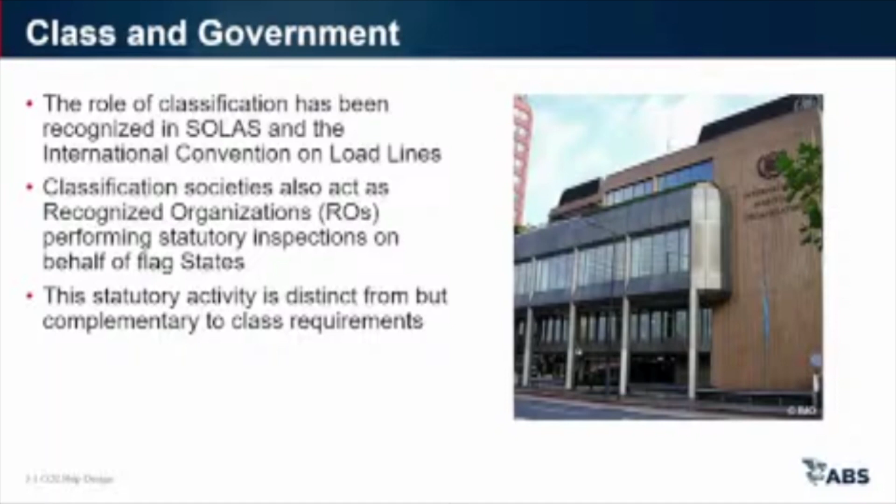The statutory activity is distinct from the classification activity. There's a lot of overlap, and the remits are very similar, but there are things classification societies put together that are not necessarily in the international regulations. How we operate is we work with all the various stakeholders in the marine industry to ensure maritime safety and to ensure compliance with the requirements and the rules.

You can see here the list of various stakeholders, and because of this interaction between all these parties, this is where we start to get questions when it comes to particular CO2 projects and how things are going to be developed specifically with regard to moving the cargo.

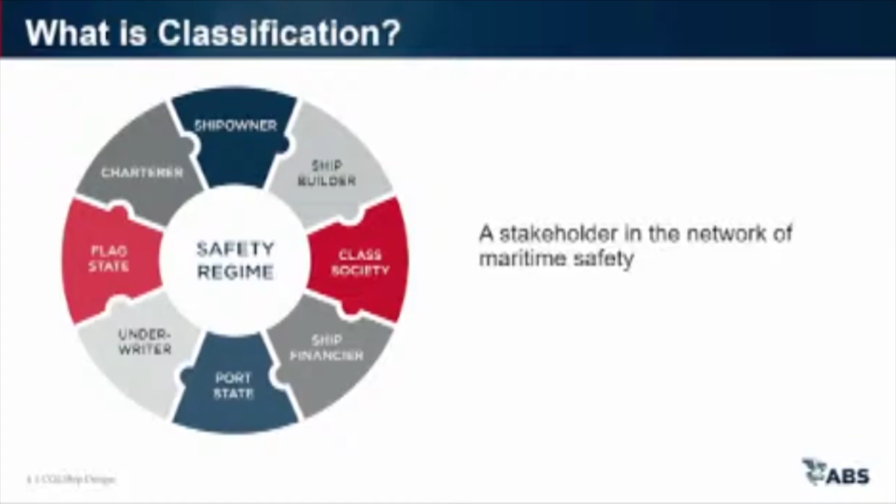We've seen from earlier presentations that there's going to be a lot of CO2. How that's going to get either sequestered or taken to sites for use will depend on specific projects, but some of these may have midstream legs that involve shipping, and those ships will have to be capable of carrying the cargoes within the sets of criteria that are out there for ships, with equivalent levels of safety.

I'll go quickly over the drivers. You've seen a lot of this already this morning, so I won't go into too much detail. But the takeaway point is that the clients we talk to and the operators of ships that may be carrying these cargoes are aware that in all the scenarios we're looking at for decarbonization, most paths involve a large amount of carbon capture, and there's going to be a lot of CO2 to be dealt with. So they see this as a possible area where they'll need to get involved, and the shipping component will have to be fully developed.

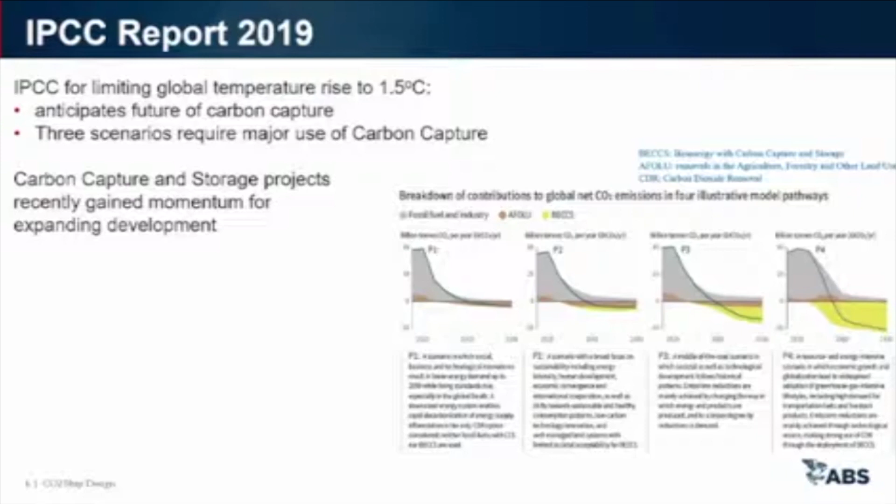The captured carbon, as you're all aware, can either be reused, in which case it's a CCU situation, or it can be locked in a reservoir, which is the sequestration piece. We've heard from at least one end of these sides of things, but we tend to be in the middle part, which is the transport part. That can take a lot of different forms. The ships themselves have to be able to deal with what's at both ends of the chain, so they have to be designed to handle what's being put on at the upstream end, and designed to suitably offload at the downstream end.

And how the ships have to handle the cargo that they actually take on board. There are things like relative pressures between the ships and the terminals that can have impacts on what the ship designs have to do. And responsibilities for who has to handle which piece of the processing of the cargo is something that needs to be developed. But when looking at these projects, the ship designers have to understand what it is that they're responsible for, what kind of pressures they're going to expect to be taking cargo in at.

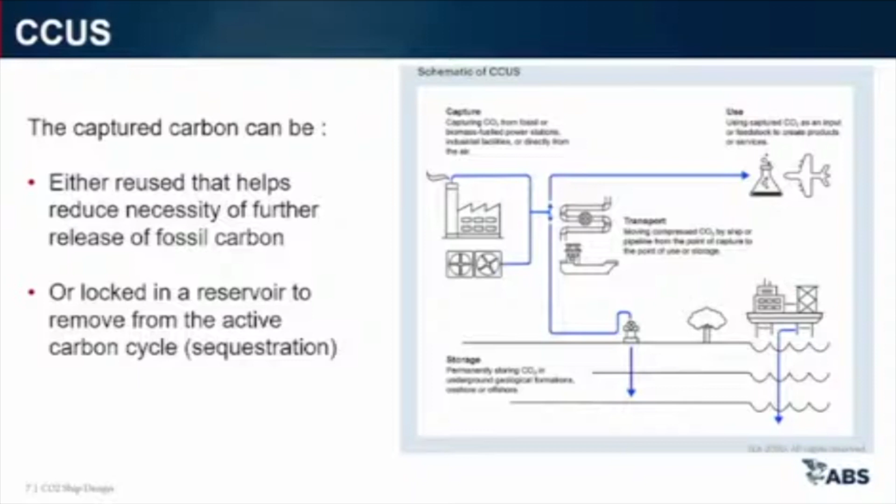On the reuse side, CO2 is a key input for many industries, feedstock for urea manufacturing, fertilizer industry, small quantities of food and beverage production, cooling systems and water treatment. And there's new demand anticipated as feedstock for producing things like green methane and green methanol as a new generation low carbon fuel.

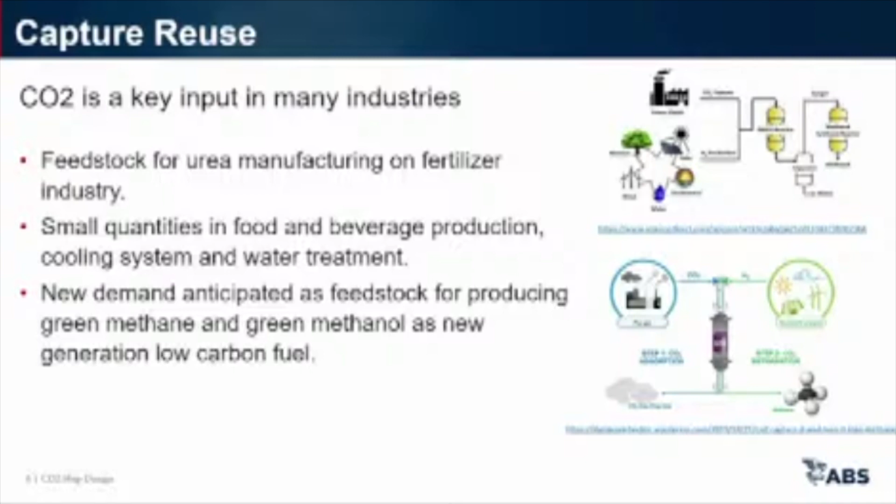As far as capture storage, I know that everyone here is very aware of these kinds of things, but essentially long-term storage is expected by injection into natural porous rock formations such as depleted oil and gas reservoirs, coal beds and saline aquifers, and that allows both sequestration and enhanced oil gas recovery. For a lot of years, CO2 has been injected during hydrocarbon production, such as enhanced oil recovery and enhanced coal bed methane recovery.

And the area where we sort of engage with the current group is that the London Protocol Convention sits out there, and this is something that our clients run into when they're looking at projects. This regards both the movement of waste internationally between countries and the dumping of waste. Of course, the 2009 amendments proposed for allowing transboundary transportation under agreement for CO2 is not yet ratified by the right number of signatories to go into effect.

So this is something that comes up with regard to every project. There may be international transshipment of CO2 because depending on how the sequestration sites are located, there may be countries that don't have suitable sites that have to move their CO2 in other ways or to other countries and locations in order to do the sequestration. And there may be other issues as well, including offshore deposition into the seabed, which would then fall under also the dumping criteria of the London Protocol.

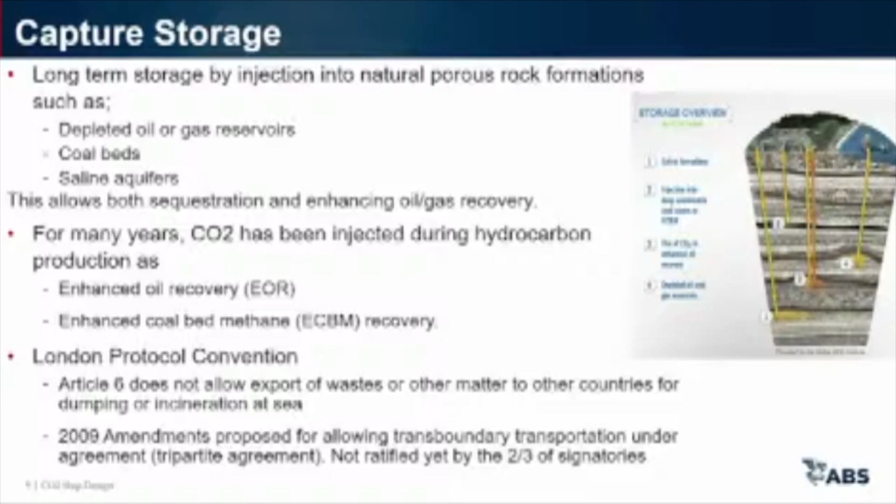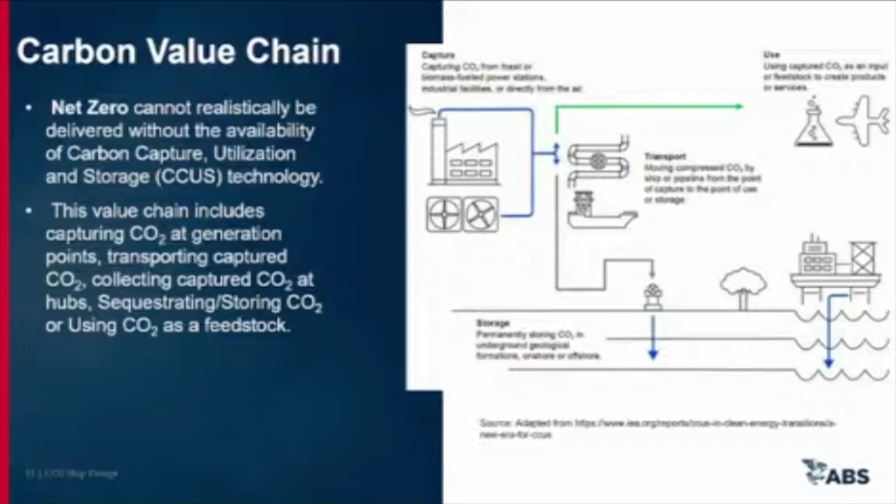I'll skip this and just focus directly on the carbon value chain. Again, this is the part where we get involved - the transport section right there in the middle. As I mentioned, the upstream and downstream ends are important for determining how the midstream portion develops, and we sit here in the middle with the transport. So there may be needs for innovative shipping infrastructure, and it has to be established based on however these individual projects form, right?

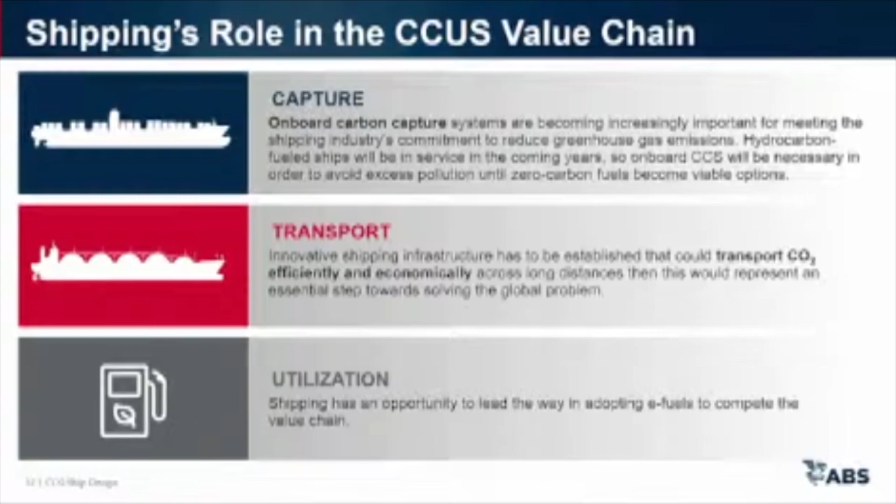So getting into the meat of the discussion with regard to the transportation vessel design itself, just a little bit of background on the CO2 shipping. Current CO2 transportation relies heavily on pipeline networks. On the shipping side, liquefied CO2 is mostly used for the food and beverage industry in very small ships at a particular pressure. It depends on what group you talk to, whether this is considered high pressure or medium pressure - I'll get into that in a second. But those vessels operate around 15 bar, minus 25 C.

The need for liquefied CO2 transport is expected to increase based on those demands that you saw in the previous graph, and that may involve scaling up fleet sizes or scaling up vessels. We're seeing mainly moves towards proposed larger ships. There are different challenges depending on how you carry the CO2 that define how big those ships can get and how exactly they're designed. The main challenge for the high operational pressure is that larger capacity tank construction complexity gets difficult, and the thicknesses go up as the pressure goes up and the size goes up, so you wind up with tanks that can be very heavy.

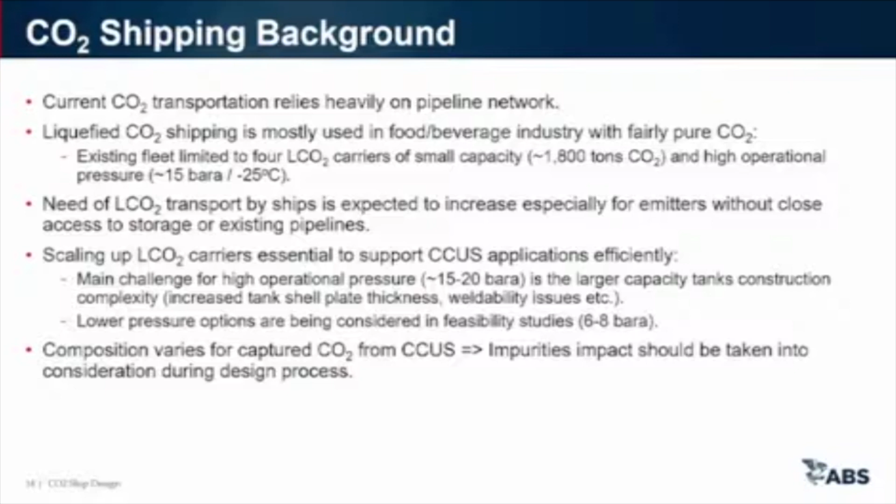So in order to avoid that, we have seen people move towards a little bit lower pressures, around the 6 to 8 bar range, in order to carry the CO2 at a lower pressure and reduce the amount of steel required for the weight of the tank and the weight of the ship. And then one of the other important issues is composition varies for captured CO2 - we've seen already a couple presentations on this morning. The impurity impact has to be taken into account in designing these vessels, so whatever's going to be in these cargoes has to be accounted for in the design.

How we deal with these depends largely on the CO2 characteristics. The CO2 properties that we're mostly dealing with is the fact that it's non-flammable, it's an asphyxiant, it's heavier than air, and it has a phase diagram as indicated here on the right, with a triple point at around minus 56 C and 5.18 bar absolute for pure CO2.

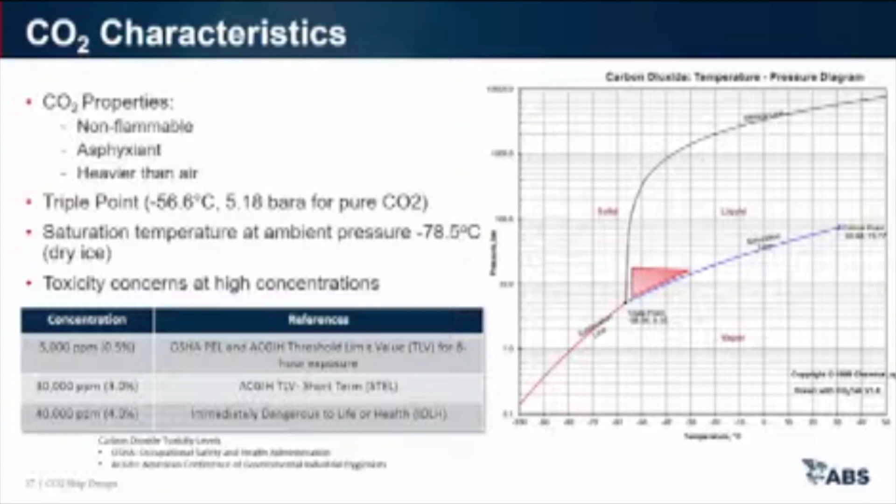There are things about impurities that can change that a little bit, and those have to be accounted for in how you set up, for example, the safety systems on board to do shutdowns when you start to get near the triple point.

As someone mentioned, it's likely that the CO2 will be carried as liquid, and so there are certain limitations because at atmospheric pressure there is no liquid phase, so you have things happening on the sublimation line if you go below the triple point.

So this has to be avoided when the cargo is being carried as a liquid, right? So what pressure you wind up carrying that liquid at saturation will define the temperature, and it may have impacts on how you decide to do the cargo cooling or the cargo handling.

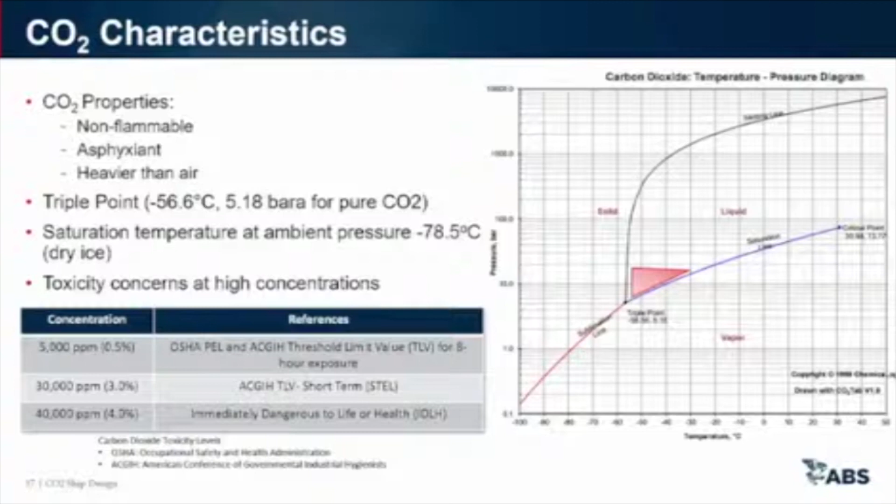There are toxicity concerns at higher concentrations. Here's a list of some of the references: 5,000 ppm under OSHA, 30,000 for ACGIH, and 40,000 is immediately dangerous to life or health. And these are things that need to be considered.

As currently outlined in the IGC code, which is the IMO requirements that would apply to the ships that would carry the liquefied CO2, it's currently defined as an asphyxiant. There's movement afoot to change that to toxic, but there's no... and then you can see in this table certain other features of the ship that have to be followed in order to comply with the requirements.

A Type 3G ship is a ship that typically has the least strict requirements when it comes to certain requirements. The toxicity aspect won't change that particular element, but there will be additional requirements that would get pulled in by the definition of the cargo if that goes through.

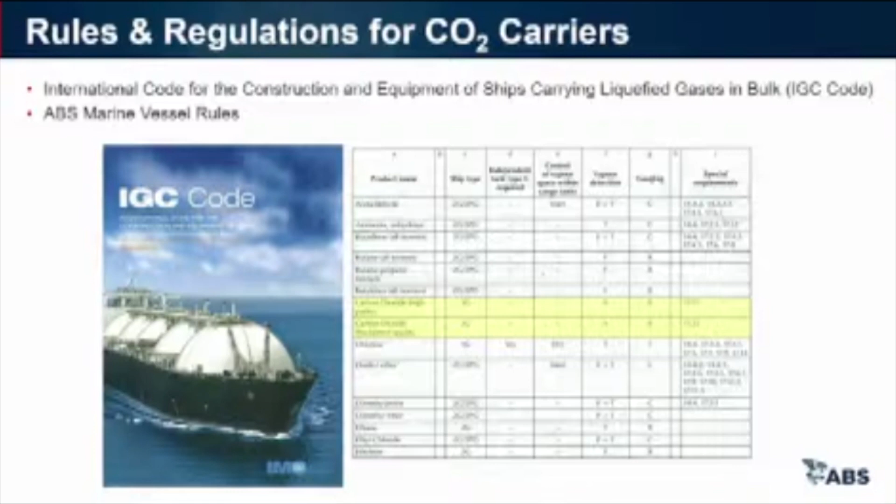So some of the risks in carriage, there's the risk of the cargo solidifying, freezing rather than sublimation, but in order to deal with this, the way the codes have been written is to have low pressure alarms at 0.05 megapascals above the triple point.

This should help. And at that level, you would wind up shutting down all your systems if you had a sudden pressure drop that could potentially wind up with some solidification or freezing of the vapor or the liquid phase. On low low pressure, you'd automatically close all the valves, shut everything down, stop the cargo compressors, stop the pumps, and put the ship in a static state in order to make sure things can be maintained at that level.

Means of isolating the cargo tank safety valves need to be provided. One of the issues is if you're carrying the cargo, which you will be, at a pressure above the triple point, if you have vapor releases, the cargo cooling associated with the gas expansion can result in things like ice formation, and if that happens in a relief valve, you can wind up with a valve that's stuck open.

So there's a particular requirement specific to CO2 that calls for the relief valves to be able to be isolated so that they can be cleared if they were to happen to pop and then stick open.

Other aspects related to that: there are certain things where on gas carriers you typically would see screens in the vents, but those wouldn't be permitted on a CO2 carrier. They'd be required in the case of many cargoes, but on the CO2 carrier they would be required not to be included, for this very reason, the freezing issue.

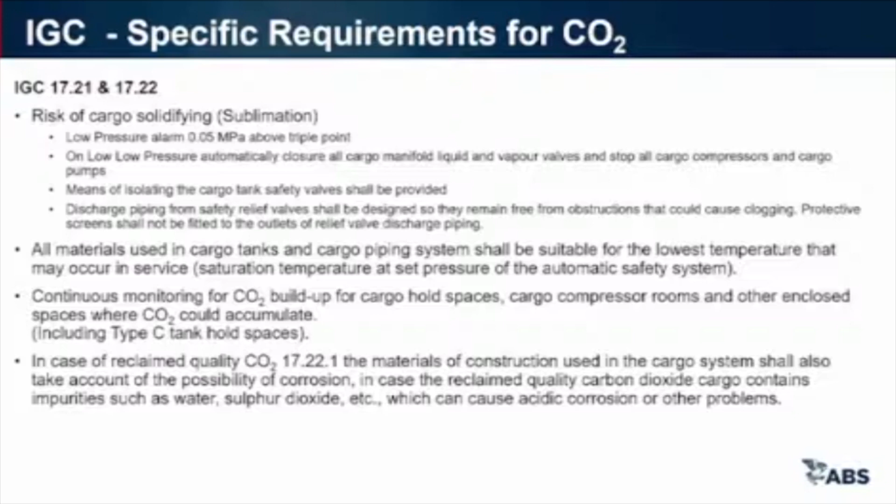The density of CO2 is heavier than air, so if you do have releases, they will drop. Depending on the ship type, you'd need suitable ventilation and suitable detection to understand that you've got a leak and to be able to control it.

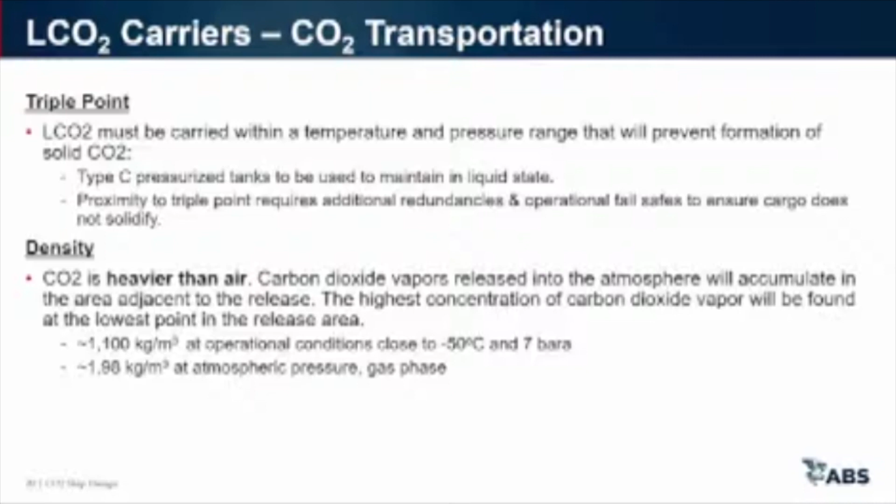It can also be, as I mentioned before, an asphyxiant hazard, and there are toxicity levels associated with the carbon dioxide that would need to be considered. This isn't entirely new, because we see it with regard to firefighting systems that use CO2, but it's an issue we need to address in the design.

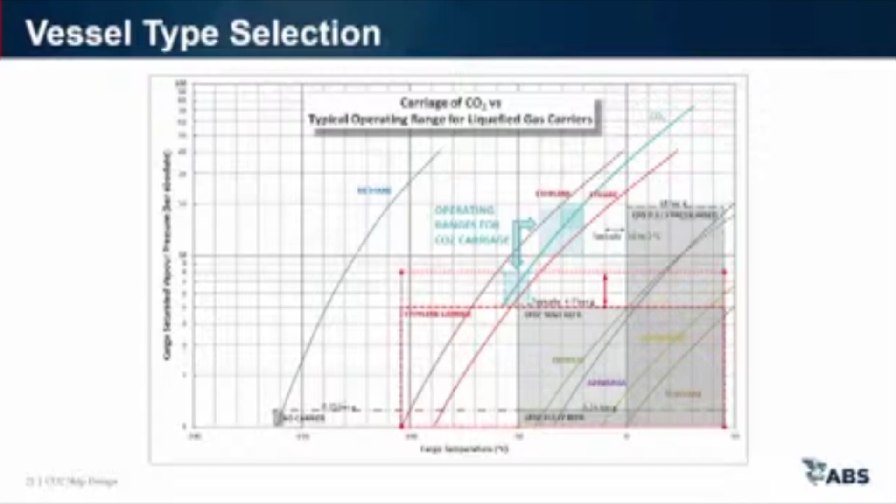If you look at the typical operating range, you can see these are the two pressure areas we see the most interest in at the moment. There are other considerations at different pressures, even higher, but these are the typical two ranges. One would be for what we call high pressure tanks at around 18 bar, and the other the lower pressure tanks, just near the triple point, at probably 8 to 10 bar.

The IGC code does refer to reclaimed quality CO2, but it doesn't give any very specific information about it. It just indicates that it has to be addressed by the designer, and the ROs would be checking what's being done. So typically you'd need to see additional work around those impurities done on a ship-by-ship basis.

Annex B of ISO 27921 provides some indicative impurity levels. We've seen some industry standards as well, and we've seen several lists this morning in some of the other presentations. But the cargo purity composition depends on various parameters: the carbon capture technology and process, and the CO2 onshore handling and storage facilities.

The impurities' effects can be things like thermophysical effects, corrosivity that might make you rethink some of the materials, how the reliquefaction plant is able to handle some of the non-condensables, and the health and safety considerations of certain of the impacts, or the impurities.

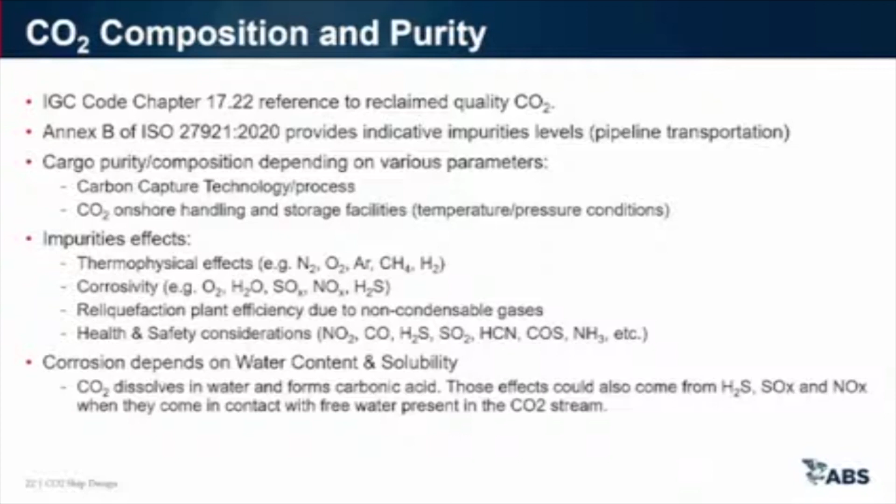Corrosion depends on water content and solubility. CO2 dissolves in water and forms carbonic acid, and those effects can also come from some of the other impurities. This is a list of just some typical ones.

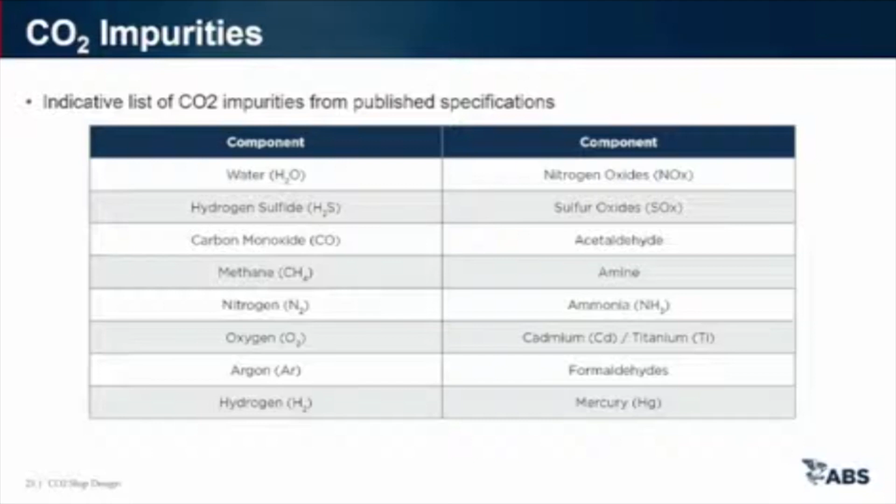In addition to individual impurities and their impact on some of the physical properties of the cargo, there may be interactions among them, and this is one of the reasons that the bigger the list gets, the more the difficulty increases, because knowing the interactions between all the potential impurities can get fairly daunting. So we try to focus on the most critical ones and the ones most likely to be in the stream.

The cargo tanks themselves - there are 3 main tank types typically included in the IGC code. Only Type C tanks are really suitable for carrying CO2 because of the pressures involved. These are pressure tanks, and at those pressures, with the liquefied gases, there's compliance with cryogenic requirements, and the pressure selected as the operating pressure and the maximum pressures are the ones that drive what those temperatures are.

And in particular, the lower pressure end also drives the temperature selection for the design.

Impurities in CO2 can potentially pose material issues, as I already mentioned. There are considerations for development of new materials in progress for larger tanks.

The typical tank types we see are cylindrical and bilobe type C tanks. The cylindrical tanks tend to be the higher pressure tanks, and the bilobes tend to be at the lower end of the pressure range. But the geometries of those tanks tend to allow for more cargo for the same size ship. Thick, low-temperature steel plates require special consideration when welding - for example, a steel tank with a very large multi-lobe configuration needs welding specifically considered to be suitable for the plate thickness and the temperatures.

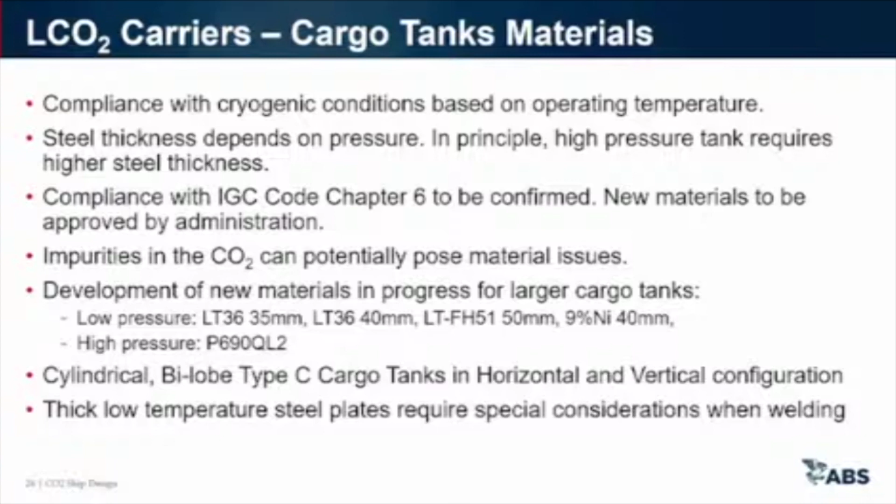Designing around the triple point - I think I've covered that already fairly well in the blockage of the pressure relief valves. Continuous monitoring of the pressure and emergency shutdown associated with low pressures is something we have to do on the ships. Permanent fixed gas detection for cargo tank hold spaces, the cargo control room, and other enclosed spaces where CO2 can accumulate needs to be provided, and a restricted level gauging system is permitted.

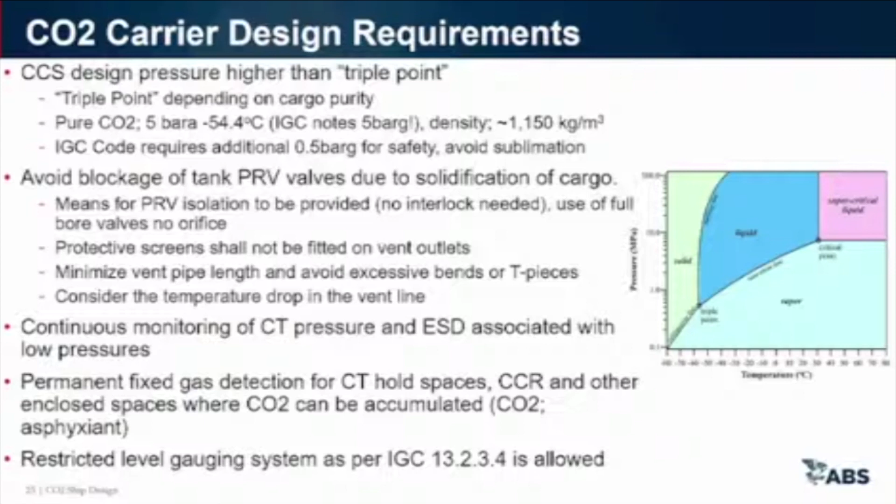Looking at boil-off gas management while sailing, we're sitting in this triple point area. There are a couple different ways that boil-off gas can be handled: either by pressure accumulation, or by reliquefaction, subcooling, or some other kind of cooling. If you go with the pressure accumulation route, you have to have a holding time calculation that shows you can maintain the cargo for the period of time necessary to get the cargo offloaded.

Operational environment, cargo and loading temperatures will have an impact on that assessment, including the operating profile, loading level, cruising range, and local restrictions in some areas. Tank pressure control during discharging is going to be important, as I mentioned already. Compatibility with the loading and offloading facilities needs to be considered, and how those projects actually look may also have impacts on the ship design.

You could have a ship delivering to a shore-based terminal and then sending it off to a treatment center before injection into the ground, or some other kind of storage facility. There may be offshore floating terminals taking CO2, in which case the interaction between those terminals and the ship has to be considered. There are several configurations that we've seen being discussed, and in each case these discussions tend to be fairly bespoke at this stage.

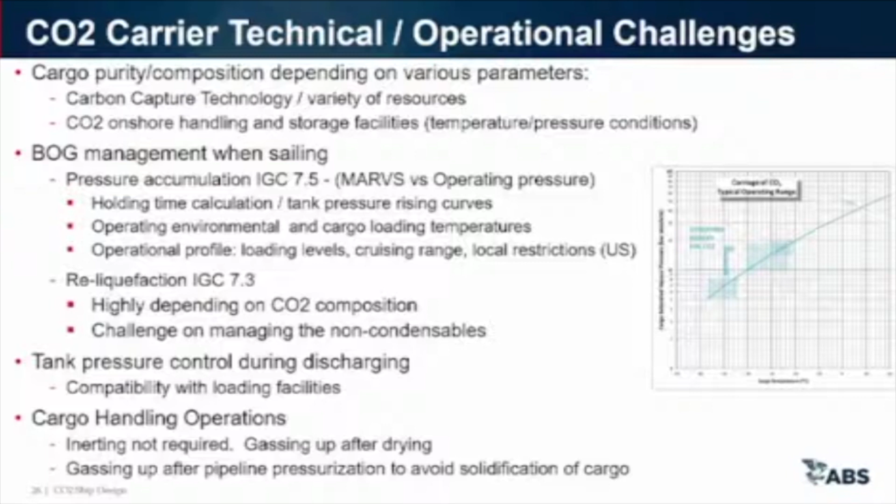Getting into the conclusions: carbon capture is generating interest in CO2 carriage by ship. This will develop depending on the actual carbon projects, and we're seeing quite a few. Designs require project specifics from the upstream and downstream end to define the vessel specifications. The regulatory framework, including the London Protocol, needs to be well understood by the stakeholders.

The technical requirements and standards for ships are mature—we already have vessels carrying CO2. There may be some new technologies that come into this, and there may be risk assessments around the project overall that have to happen. Understanding how the additional requirements of localities, ports, and coastal states may have impacts on how those requirements apply is important. But by and large, most of the technologies are mature.

Impurities drive the cargo definition and are highly relevant to the ship design. Collecting that information and understanding what the carbon capture streams are producing, and how much treatment will be done on shore versus on board the vessel, will be important to getting these projects to happen suitably. Early cooperation among stakeholders in the full chain is the optimal path, because then you can understand up front what you have to deal with, and we've been seeing a lot of that.

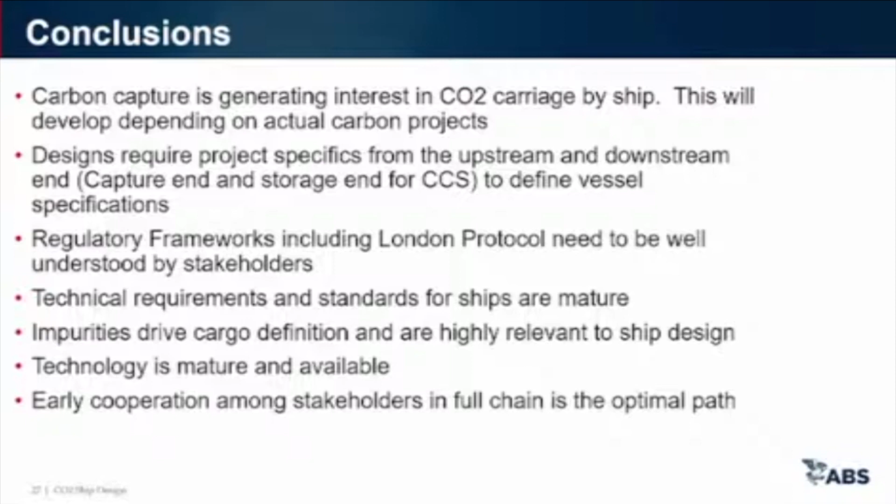So I will leave it there, and thank you for your attention and your time, and open for questions.